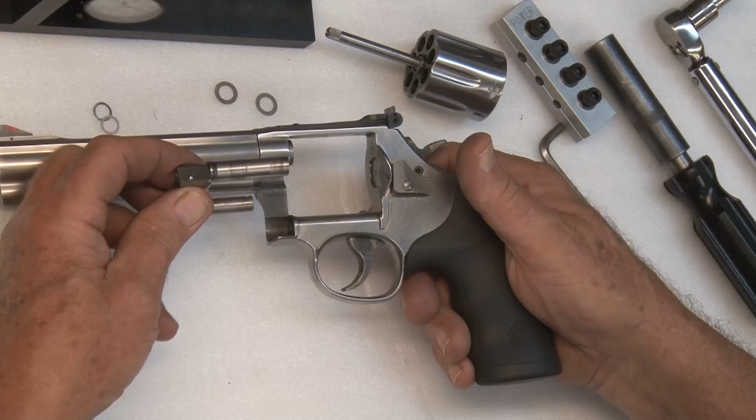Right now we're going to talk about your yoke endshake and how it's corrected. So you remove the yoke from the revolver and the cylinder from the yoke, and then you put the yoke back in the frame, close the yoke, and then you apply pressure here. And I can feel that yoke move.

And the reason it moves is because this metal right here, there's more metal removed off there or the frame, and this allows it to play against this shoulder. Now, this shoulder's like a locking lug right here. And whenever it is in the revolver and it closes, it should shoulder right against the frame in this area here, and it should be feeling snug.

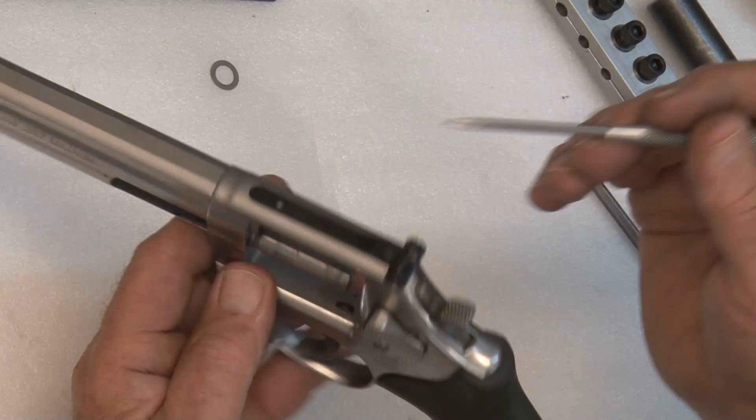So since we had the yoke endshake, we get a PY2, slide it over the yoke, place the yoke in the frame, close it, and you should feel just a little resistance right there. That means this area is bearing against the frame right here. And you have to have that regardless what people tell you about yoke endshake. It has to have all of it removed when this is up like this in the frame and the yoke is closed in the frame. So that takes care of your yoke endshake.

A lot of times your yoke will be out of alignment. So you take your alignment tool, place it in the barrel of the yoke, close the yoke, place the tool in there, and you push it to the rear. And you see it hits a little bit at 12 o'clock in this area right here. So that means it's up a little bit in this particular gun.

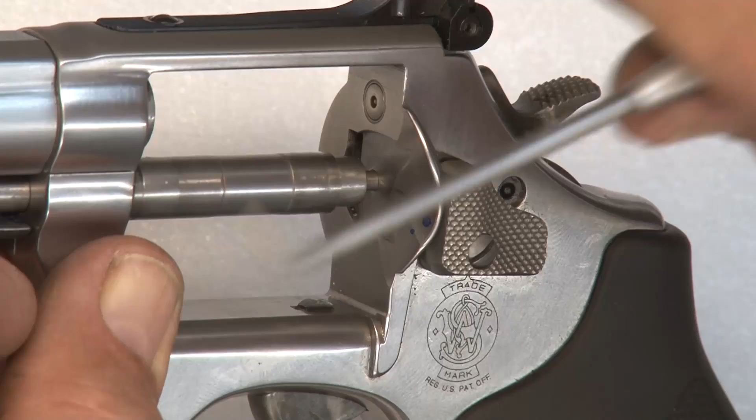Now when I say 12 o'clock, that means when you're pointing the revolver away from you. 12 is up, 3 is right, 6 is down, and 9 is to the left, pointing the firearm away from you. So that alignment tool is hitting at 12 o'clock.

So all we do is open the yoke with the alignment tool in it, take the handle that comes with your yoke alignment tool fixture, and you slide it over the barrel of the yoke, and you apply pressure down. This gives you a gentle bend that you can control. You apply a little pressure down with it until you feel like it's bent a little bit. Then you close it again. See how it went in that hole? Look at that, straight in. So that yoke is in alignment.

Now if it's hitting at 3 o'clock, which would be hitting on the right-hand side of the hole, then what we want to do is bend this way towards you, and that'll spring it to where it'll go to the center alignment of the pinhole. But that's good alignment right there. All right, the yoke is in good alignment.

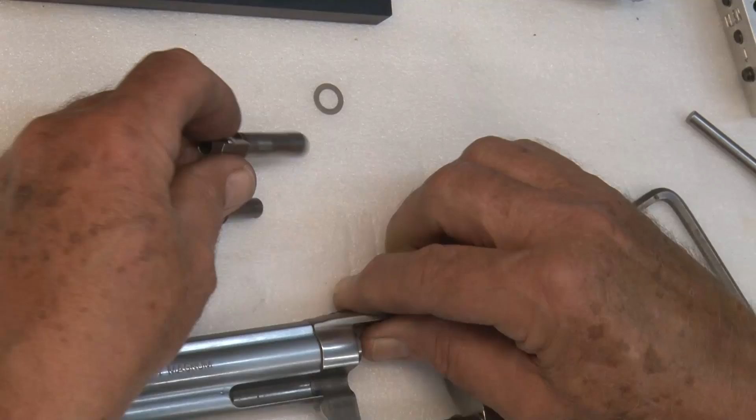The next thing we discuss when you've got the yoke in good alignment with the 1 PC or PY2 on it is your cylinder. So you place the cylinder on the barrel of the yoke, place it in the revolver, and close it. Now this is cylinder endshake. You apply pressure with your left and right hand thumbs, and you push. If you look, you can see that move. Now we're guessing that's about 2 thousandths, maybe a little bit more.

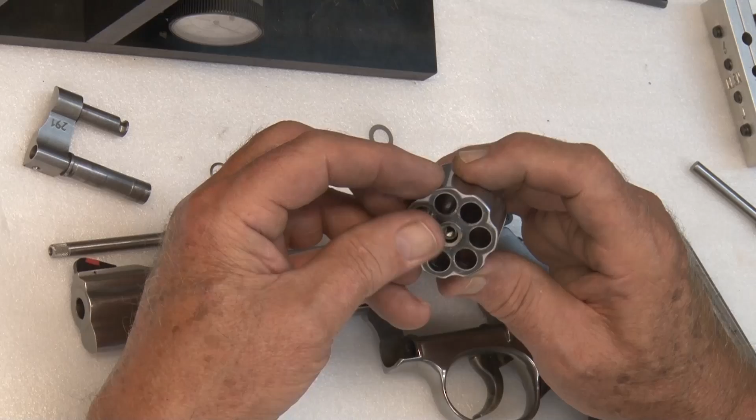So you remove the cylinder from the yoke. Now we're doing this with a loose ejector rod. So we take the ejector rod out of the cylinder, spring and the center pin, and you try 1 PC2, which is 2 thousandths thick. Now you'll notice on Smith & Wesson, you have to take the center pin and ejector rod out in order to get the bearing in there. So the spring holds it down.

Finger tight. Place this on the barrel of the yoke. Be sure you didn't lose your PY2 on the yoke. Zero endshake. Now you've got to be sure it moves freely. The cylinder turns free. Now if this was too tight,

that means you'd probably have to take the yoke out and use your Power Custom sleeve that slides over the K, L and N. Slide the sleeve over and you use a hammer boss cutter, which is the same as a yoke cutter, and just turn it this way, and that takes a little bit of the metal off the back of the barrel of the yoke, and that gives you a little more adjustment on the yoke so that it won't be too tight.

And it's all trial and error. But this one's a good one. Now we're ready to torque the ejector rod in. Now we are assuming that we have the correct head space.

That's covered under gunsmithing. Whenever you adjust the head space, you have to adjust it with this area here on the extractor where it seats in the frame here. You might have to take a couple thousandths off and maybe lower your ratchets 3 to 5 thousandths below that area there. Your ratchets should be lower than that. And that sets it back, gives you head space.

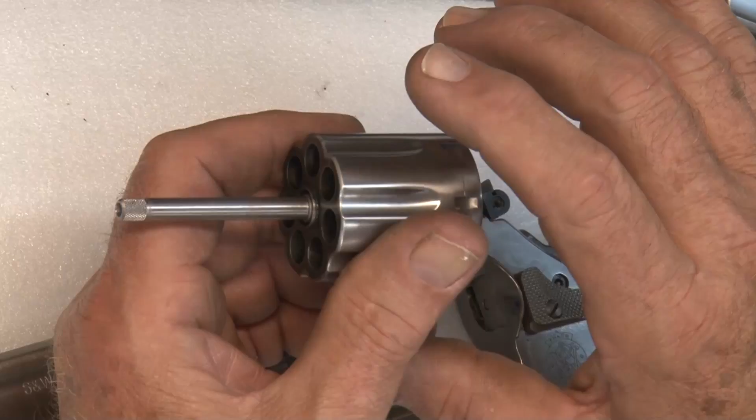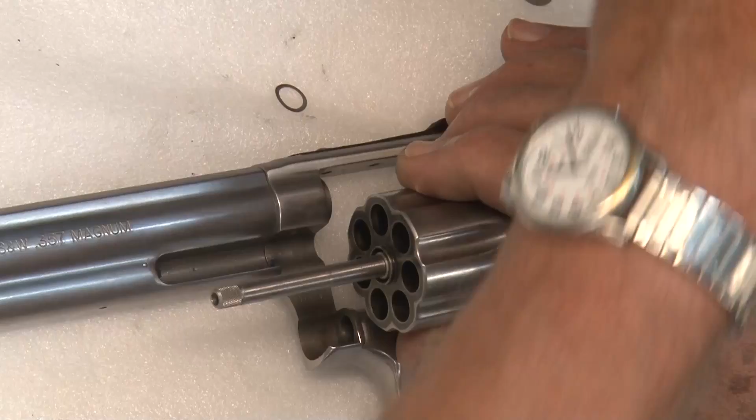But usually when you move the cylinder to the rear, that gives you more cylinder gap. So you don't want to have too much cylinder gap. Or you have to set the barrel back and adjust cylinder gap. So now we're ready to torque in the ejector rod.

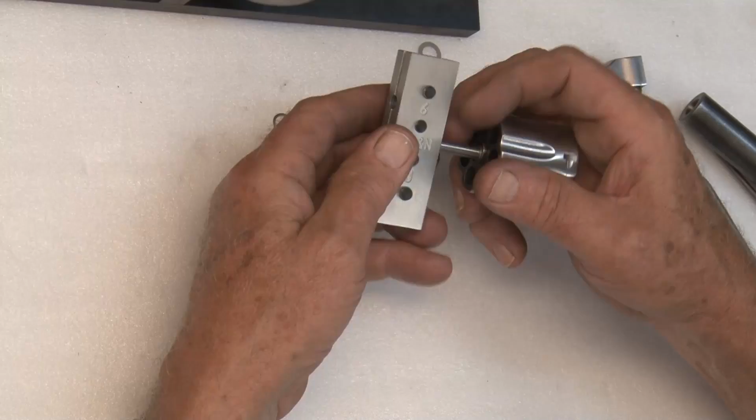Use your Power Custom wrench, and you'll notice this first number is 6. That's for 6 series Ruger, Security-Six, Speed-Six, those revolvers, and then K, L and N is the center one, and this is the Smith & Wesson J frame. So just put that over the ejector rod,

tighten the screws. That clamps those, and then you got to put a lot of pressure on there. You got to get them pretty snug. All right, now see that turns that. See the cylinder turns. Now we're going to tighten it, which is counterclockwise on the later model guns.

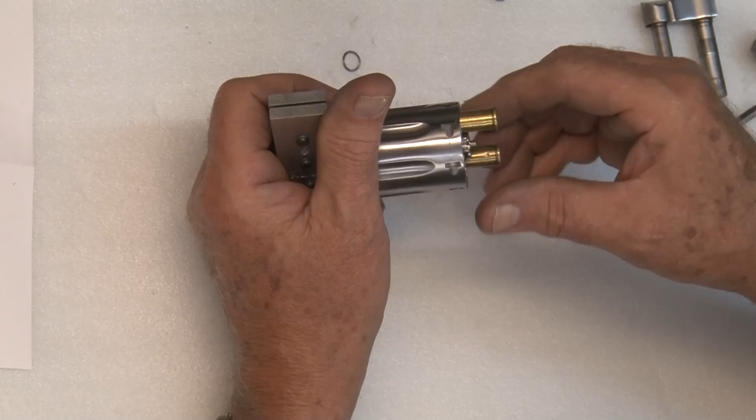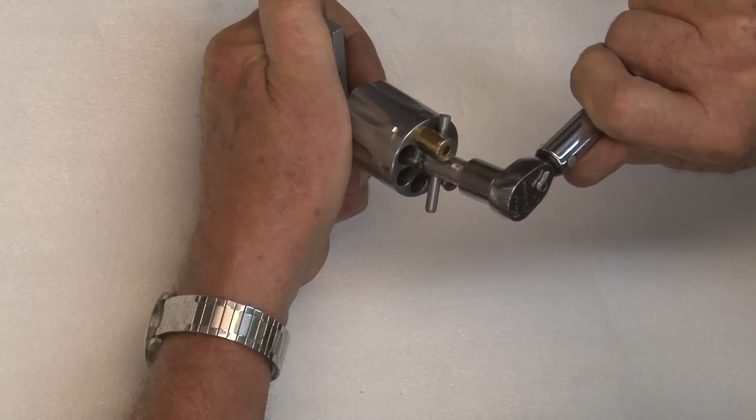Now, we don't know what we got, but if you get it tight enough to the proper tension, which is 45 to 50 inch-pounds. Most people just screw it on good and snug by hand and let it go. But you can put a couple empty cases in the cylinder. You hear it break over, that inch-pounds wrench. So that's 45 inch-pounds. So it won't come loose.

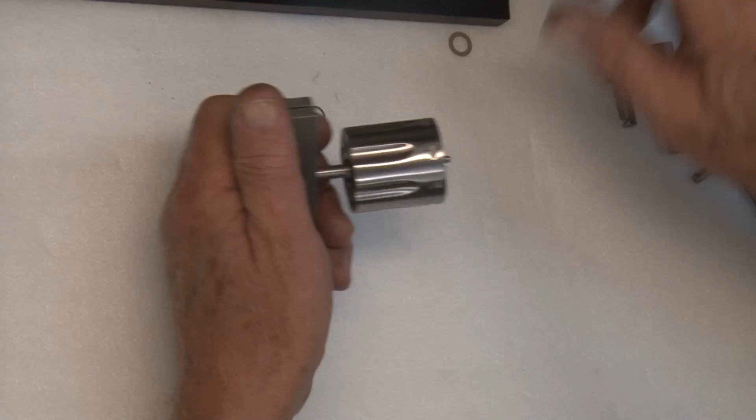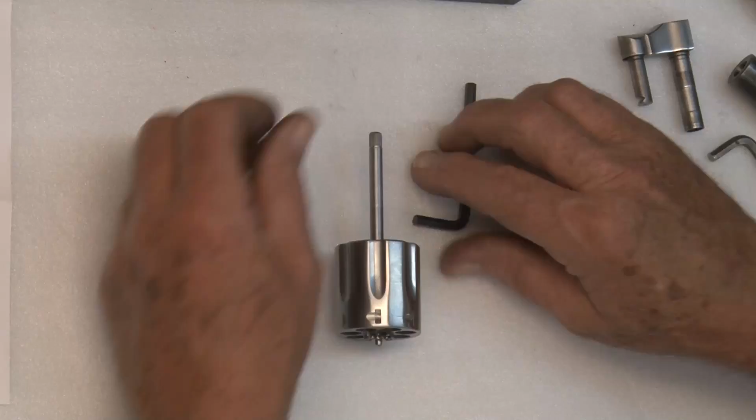You don't need Loctite. You never want to use Loctite in those threads because you can't get to them. So now we're going to remove it from the wrench. All right, now we're ready to use our alignment tool. And when you get this alignment tool, you won't get a dial indicator with it.

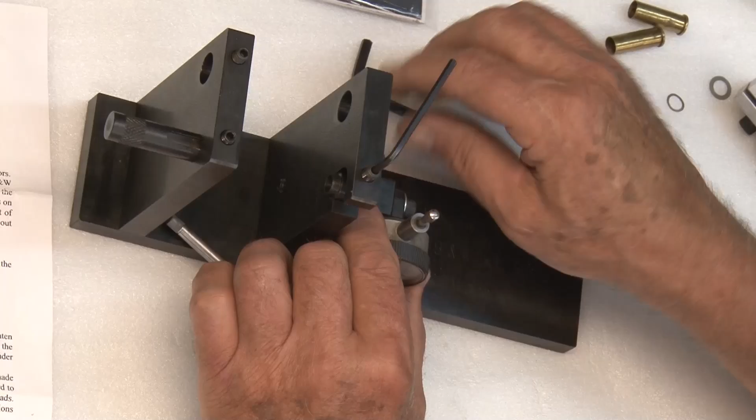This is specifically designed for the Mitutoyo dial indicator, but there's other dial indicators that'll work. It's also cheaper. But you put your dial indicator on your stand, and you can just put it on there snug where you can still move it to adjust it before you tighten it up. Then you put this back on the frame.

Okay. Now you see this screw here, that's a stop for your dial indicator holder. So you might want to adjust it a little bit when you put the rod in it. Use the Allen wrench on the front bushing, put the bushing on the cylinder. Loosen the back. Put the cylinder in there like that. Put the bushing in there and tighten it up.

Cylinder needs to turn free. Okay, now we slide this under it. That gets under it. Now see, it needs to go back under the smooth part, so we adjust that stop where it's underneath the smooth part of the rod.

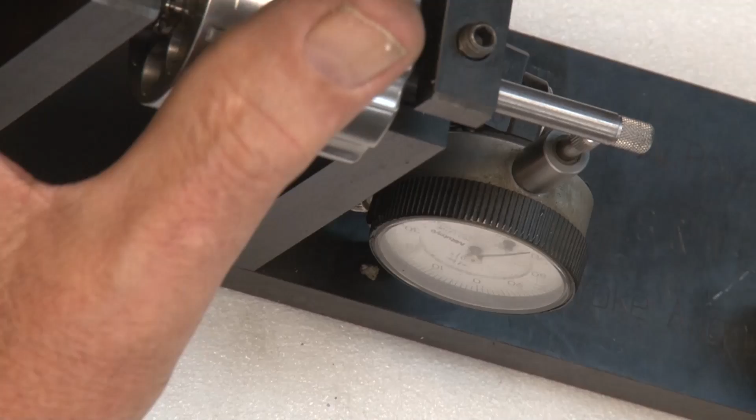Okay, you see we're about 5/1000ths off. So you rotate it to where this is counterclockwise. That means the end of this is up.

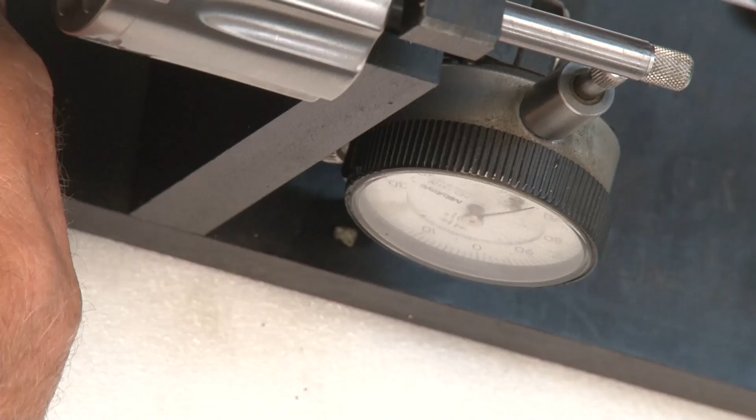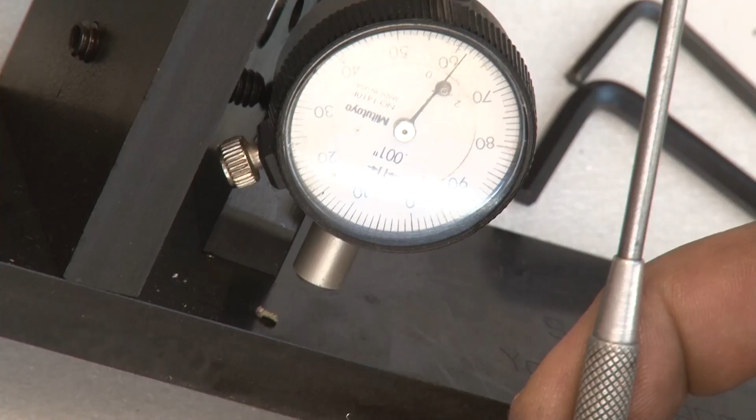Now, by the way, when you got your ejector rod alignment tool, you got a little spring that came with it, and you put that little spring in this cup. That gives you extra pressure pushing up on that rod to read the extreme readout on your ejector rod. So don't forget to put the spring in there, because it won't read correctly without a spring in there.

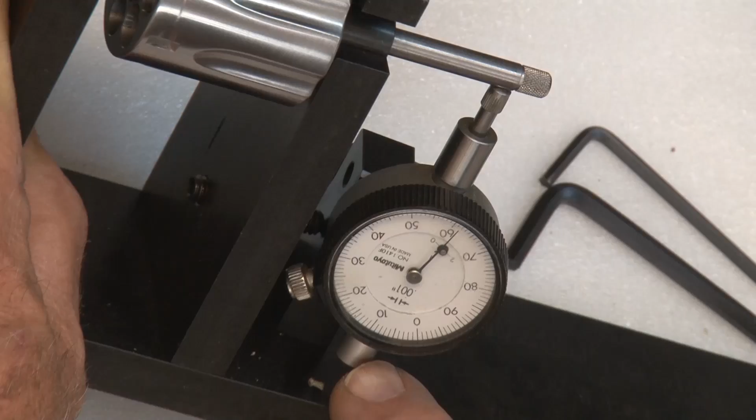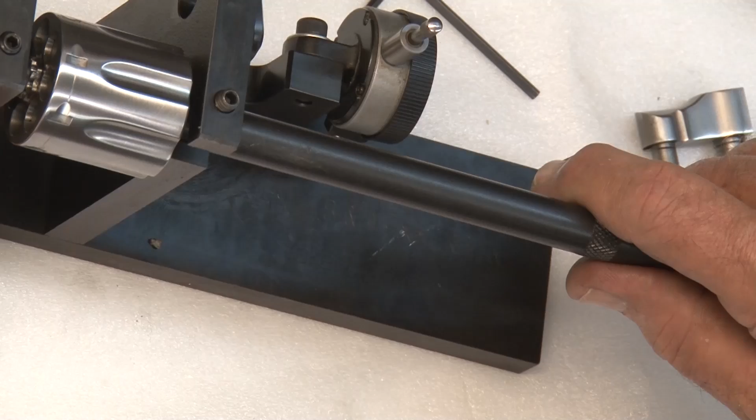All right, where it's counterclockwise on a dial indicator, you take your handle and slide the small end of the handle over the rod, and you apply pressure down, because remember it was pointing up, you put pressure down. It's trial and error. There, within 1/1000th right there, that's close enough. See, it just barely moves. So that means we got a straight ejector rod.

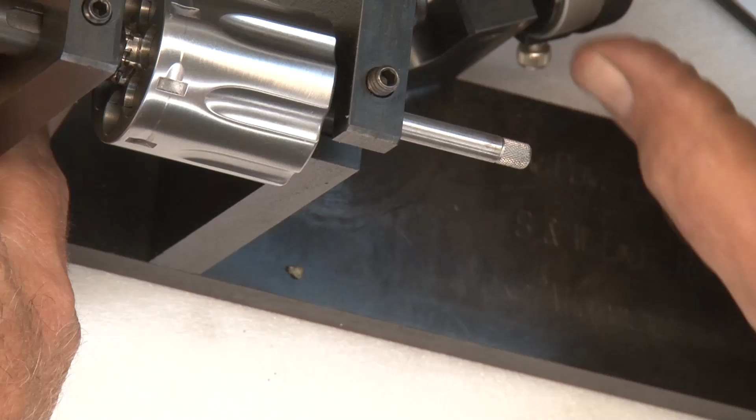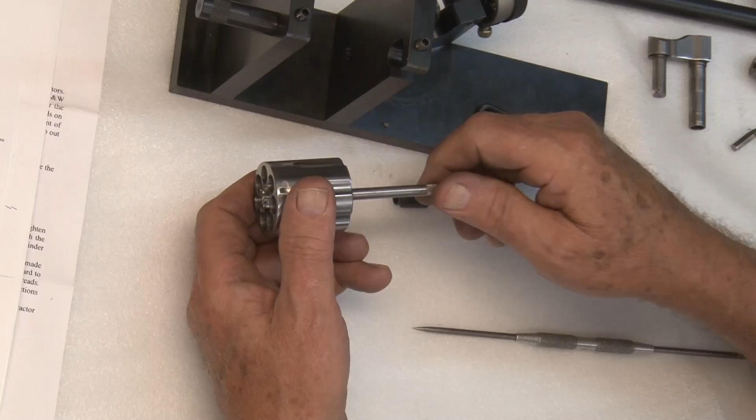Every time you unscrew that ejector rod, it'll never go back straight until you straighten it after you torque it in, because when you torque it in, the torque will pull this a little bit one way or the other, a few thousandths. So torque it to the proper inch-pounds and then straighten it again. And you can straighten it about 4 or 5 times before you have to re-torque it to 45 to 50 inch-pounds.